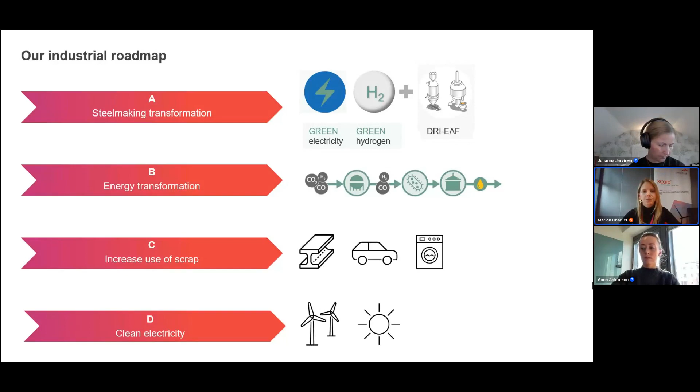Now going a little more into the details of the different pillars. Steelmaking transformation, as I already mentioned, we're working on switching from natural gas to hydrogen, but also sourcing the green hydrogen. For this, it's important to mention there are synergies and collaboration with local governments to produce this green hydrogen. So it's not only that we rely on an existing source, we are also involved in generating that green hydrogen.

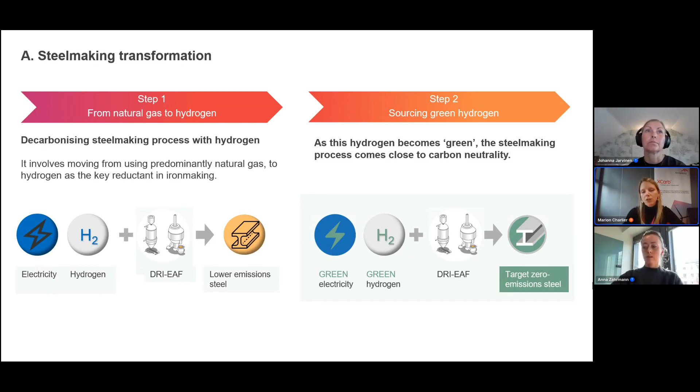Then in terms of energy transformation, I told you I'd give an example. This is the one I've chosen, existing today in our mill in Ghent, Belgium, where we are actually capturing the blast furnace gas and transforming it into ethanol that can be used in various applications, for example transport. So this is an example of improvements that can be brought to a blast furnace site, which is today the most intensive production route.

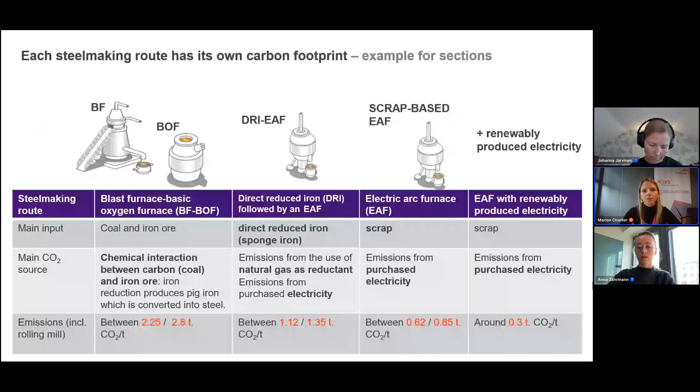We continue with increased use of scrap. As I told you, the scrap has to be recovered as best we can, and we make sure to use it wisely to make new steel out of waste. This is a fascinating feature of steel, that it can be recycled indefinitely without losing its mechanical properties. Knowing this, it would be a pity not to recycle the scrap that we have.

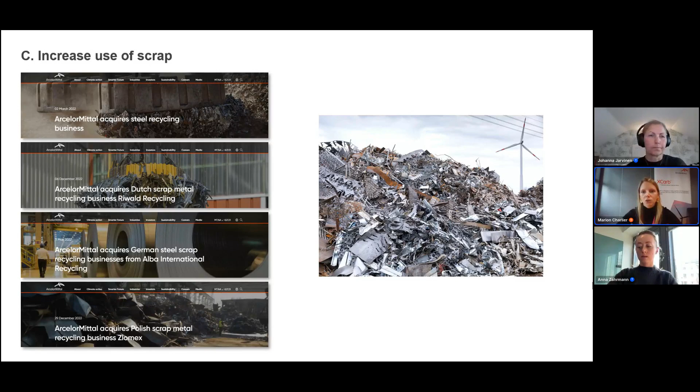And as a link to the use of clean energies, I wanted to talk briefly about the XCarb Innovation Fund, because I think this is quite unique. ArcelorMittal has committed to spend $100 million a year into other companies, companies necessary to reach our carbon targets, because most of our developments really rely on the use of energy. We're talking about hydrogen, renewable electricity, and we need to make sure we're able to produce that extra demand of electricity, and that we're working together to achieve these targets. Even though we're launching a lot of initiatives in-house, because we're still manufacturers and there are things that are our responsibility as steel makers, there are other things that are not our knowledge or part of our skills. So we need to make sure we work with the right collaborators to make that happen.

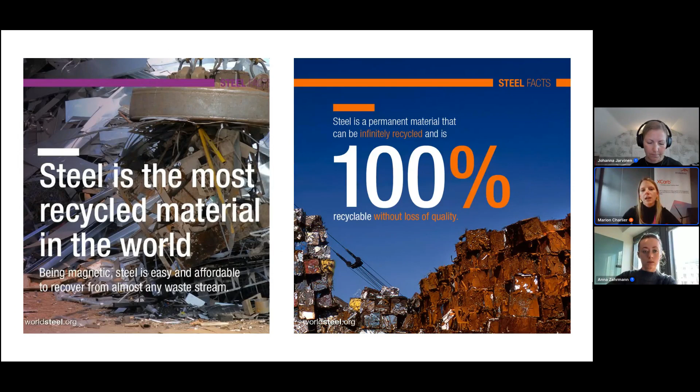So now, for the next slides, I would like to come back on the EAF production and on the recycling of steel, because within all of these initiatives that I have told you, there are many things ongoing, but it's important to stress that not everything will be ready at the same time.

First of all, it's really important to understand that both primary steelmaking and secondary steelmaking need to decarbonize. We need everything I told you, like the switch to DRI, the use of efficient energies and so on, to be deployed. But switching one manufacturing site from a blast furnace to DRI takes a couple of years, also to source the green hydrogen.

So if today some customers are contacting us to reduce the embodied carbon of their project, we would advise them to work with our brand called Recycled and Renewably Produced, which covers all of our EAF manufactured products, meaning that we recycle them and use renewable electricity for that.

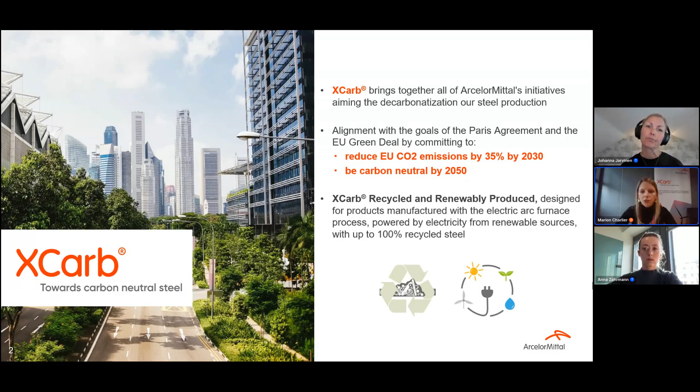For example, if I take our sections that we manufacture here in Luxembourg, we use 100% scrap and renewable electricity. And doing so, we are able to bring the global warming potential for the production stage to 333 kilos of CO2 equivalent per ton of steel. If we compare to the average for the global steel industry today, the difference is quite significant.

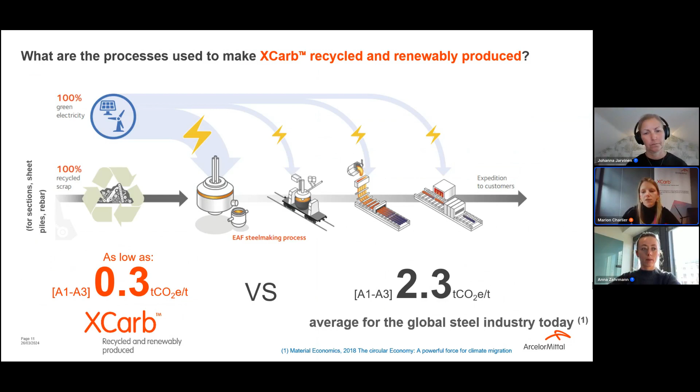Within this XCarb Recycled and Renewably Produced family, I just told you about the sections we make here in Luxembourg. In Luxembourg we also produce sheet piles, but there are other products that can be made through that production route. We have hot roll coils that can be used to make steel deckings, facades. We have rebars, heavy plates, which are used in construction, but also in the energy sector for wind farms, shipbuilding, and so on.

So yeah, this was the first part really related to steelmaking, what the steel industry is deploying, and also what we are doing within ArcelorMittal.

Thanks, Marion. You mentioned there quite a few ways to decarbonize steelmaking. Apart from those you mentioned, are you aware of any other initiatives in the wider industry, or yourself, that people are maybe starting to look at the moment, which are not ready but have potential?

Yes, so there is one more path being investigated at the moment: the direct electrolysis of iron ore. As I told you, when we make primary steelmaking using iron ore, which is present under the form of iron oxide, we want to remove that oxygen from the iron. In the blast furnace and in the DRI, we do so by using a reductant, either coal, natural gas, or hydrogen. But it's also possible to detach these atoms from one another using direct current, using electricity, so we do not need the use of coal, natural gas, or hydrogen.

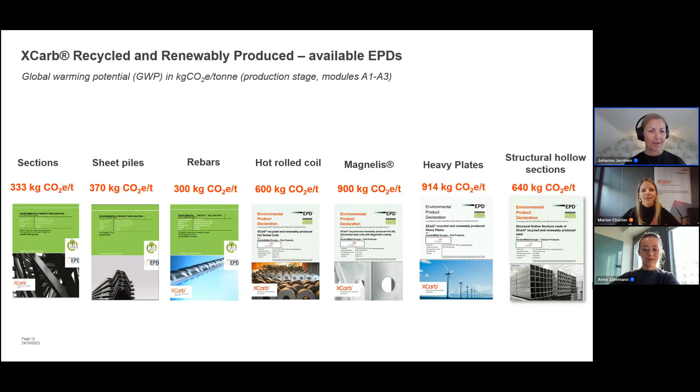Next, second block of today's contribution is about decarbonizing the built environment and how steel structural solutions can support sustainable projects. So here we've covered the more material science, material part, and we enter the more structural engineering part.

So I wanted to start with this LETI guide, which has been published in the UK, where some targets in terms of kilo of CO2 equivalent per meter square are provided depending on where we are in time. If we take as anchor, as targets, what they provide for best practice 2030, we see that we need to fall below 350 kilo of CO2 equivalent per meter square.

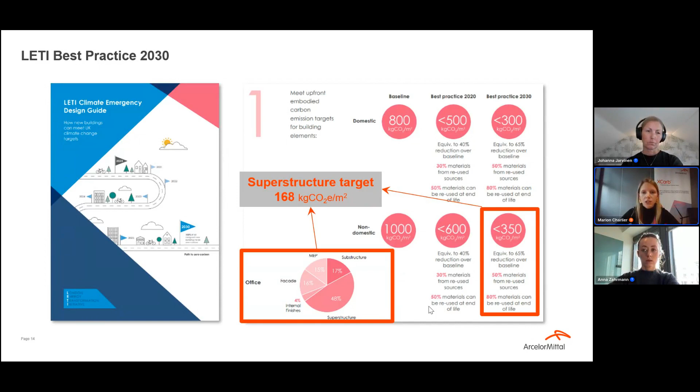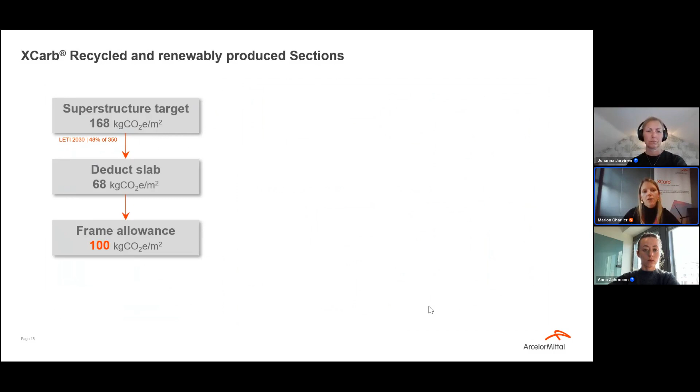If we look at the chart at the center of the slide, we see that for an office building, roughly the superstructure accounts for half of the emissions. So going from 350 kilos of CO2, we take half, giving us a target of roughly 170 kilos of CO2 equivalent per meter square. We deduct the slab, which we assume is roughly 70 kilos of CO2 equivalent per meter square, leaving an allowance of roughly 100 kilos of CO2 equivalent per meter square for the frame.

Now we look at the carbon intensity. If we take an office building as an example, we see that depending on the height of the building, we have a different steel intensity. As an example, for a steel frame high-rise building, we have roughly 90 kilos of steel per meter square.

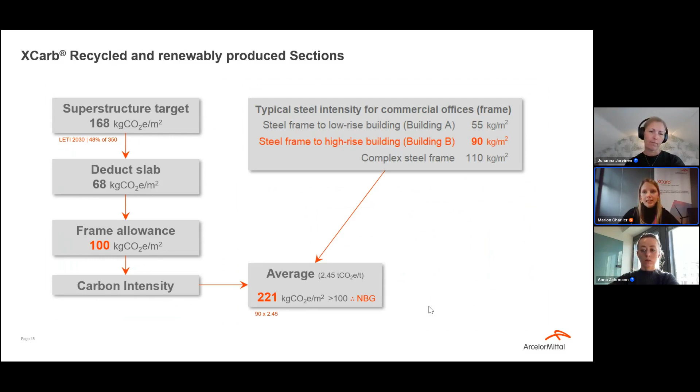So now we have several possibilities in terms of carbon intensity. With an average of roughly 2.5 tons of CO2 equivalent per ton of steel, which is what we have for the blast furnace route or as an average in some parts of the world, we would end up with 221 kilos of CO2 equivalent per meter square, which is above our target. But if we use xcarb recycled and renewably produced steel, because the carbon intensity factor is much lower, we reach a much lower number, actually way below our target, so we're okay with that.

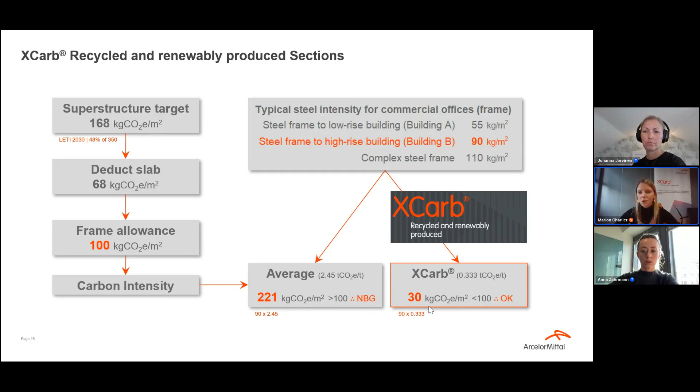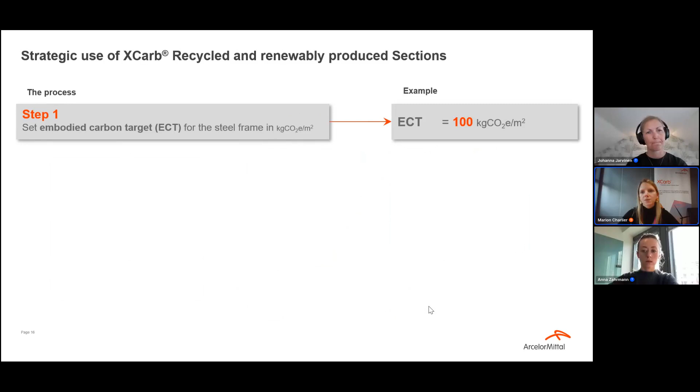But instead of using xcarb everywhere, we can set an embodied carbon target. So here we have our 100 kilos of CO2 equivalent. Then we calculate the steel intensity, which we know for our office high-rise is 90 kilos of steel per meter square. We calculate the average carbon intensity required for the steel sections, and we see that we would need to reach a carbon intensity of roughly 1.10. To meet that target, we can calculate the minimum percentage of xcarb required, and based on these numbers, we would need 64% of xcarb to meet the target.

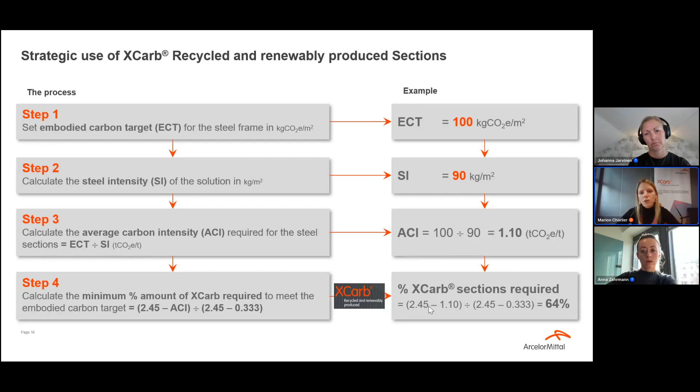So this is the kind of reasoning we can apply when looking at material only, which is good. But choosing low carbon material is clearly not sufficient. As architects and structural engineers, we need to couple this with clever design, trying to reduce to the best of our capability what we build. I assume most of you are familiar with this hierarchy where we try to build nothing, then build less, we need to build clever.

For example, when it comes to steel structure, quite simple but effective measures would be, for members where it makes sense, to use high steel grades. For example, for columns, which are driven by resistance, this makes the superstructure lighter. We need steel sections which are globally smaller, we have less material, and so we're making carbon savings. We're not even talking about low carbon steel here, just making material savings. But on top of having a lighter superstructure, we will also have less foundations. So all of these things need to be taken into account as a whole, really having this holistic view of the project.

Another example is the use of cellular beams, beams in which we have holes in the web, because from a certain number of levels, we can actually gain one level, since we reduce the floor to ceiling distance. This reduces the total height of the building, which also translates into savings - money, but also carbon - when it comes to facade, staircase, and so on. All these things need to be carefully thought through when we prepare the project.

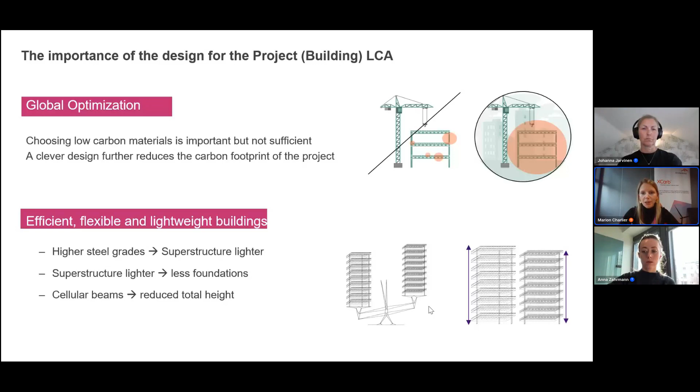Talking here about columns, it's a simple but clear example. We consider a steel column subject to axial loading, buckling length 3.5 meters. We make a first pre-design, and if we design in S235, a very basic steel grade, we would require as a section an HEM 280, which is almost 200 kilos of steel per meter. But if we just change the steel grade to S355, which is also quite basic but better than S235, now the required section is smaller, an HEB 320. So we're reducing the weight of the column and making savings in terms of carbon.

Then on the third data point, we're actually accumulating two things: the use of HISTAR 460, an even better steel grade, and xcarb. Combining these two, the reduction is even bigger.

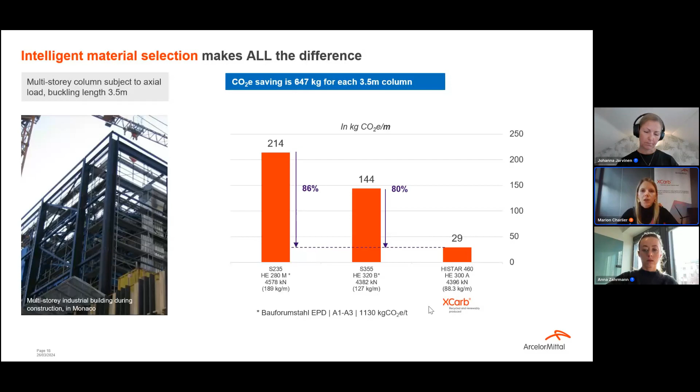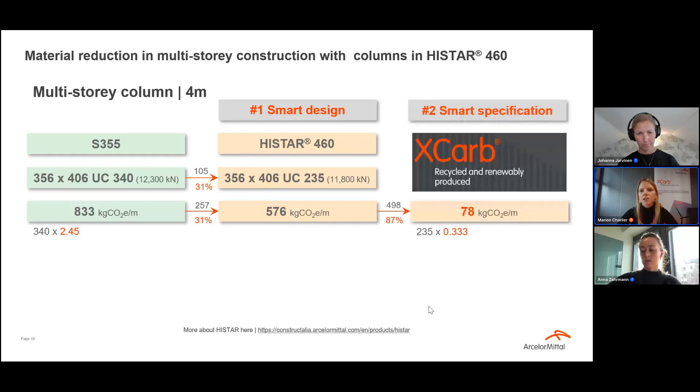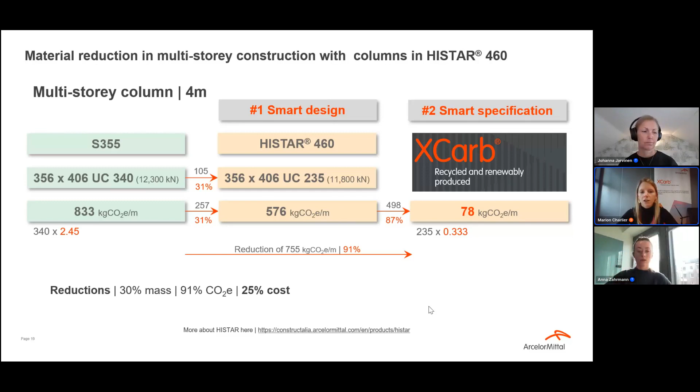Here is another example, similar to before, starting from S355 for the column. First, we do a smart design—that's the first step. Here we use a HISTAR 460, and then with smart specification we use xcarb steel, reducing the carbon footprint by 91%. We have a reduction of CO2, but also a reduction of cost. That's important to consider, since we always have different constraints on a project—sustainability to address, but also a budget to respect, speed of mounting, fire requirements, all these things need to be kept in mind.

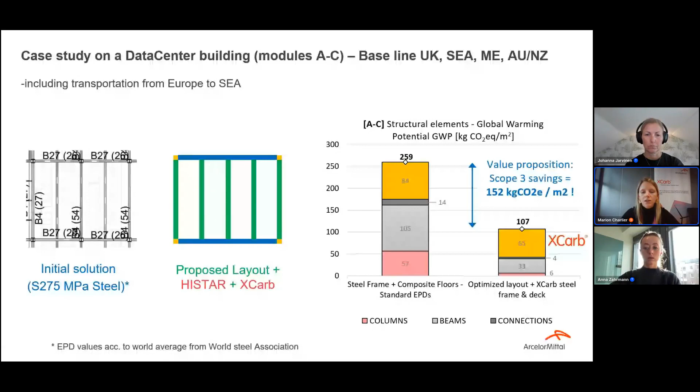Another example here, for a project where we received from our collaborators a first pre-design initial solution, a steel frame based on S275 megapascal steel. We simply switched to HISTAR for the columns and the use of xcarb. Also, if you notice on the option on the left, there was a column at the center of the bay that we removed in the proposed layout. From this, we could quantify the Scope 3 savings and highlight the benefits of using that new layout.

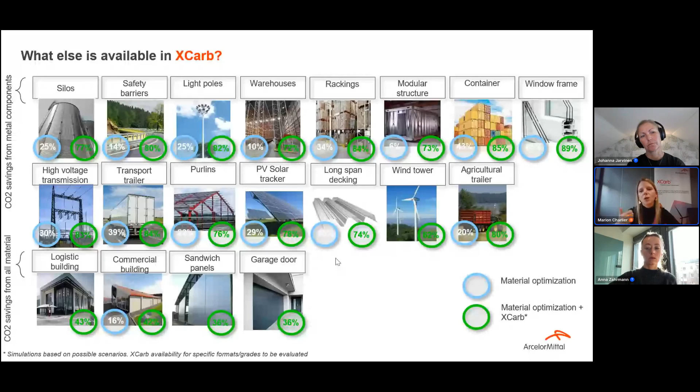Going on to other aspects of buildings with steel—so far I've mainly talked about steel frame, but there are other products that can be obtained in xcarb. You can see here some examples where, in the blue circle, you see the gains achieved with what we call material optimization—so not yet talking about low carbon steel. Then the green circle shows the gains when we combine material optimization and low carbon steel, xcarb.

In terms of structural system, I've already mentioned cellular beams, which to me are a really good example of an innovative solution we can deploy. We take one beam, cut continuously through the web, separate the two parts, and reassemble them by welding. We end up with a beam that, compared to the original, has a greater moment of inertia but the same weight as the original beam, which has a lower moment of inertia. The cellular beams are also interesting if you want to pass, for example, ducts or MEP through the openings.

Something I'd like to mention, because I personally feel it is really important, is to play to the strength of each material. So far I've been talking about steel, but for me it's really important to combine materials and place them where they are most needed—to use the right material in the right place.

So of course we talk about composite structures. Steel and concrete composite structures are quite well known and well deployed, because we really put the material where it is needed. But we are also working at the moment on steel plus timber solutions, which have existed for some time as non-composite members—for example, just putting a CLT slab on the lower flange of a steel beam. Now there is research ongoing at the University of Luxembourg to demonstrate composite action between steel and timber, which is really an extra step we can achieve in terms of structural optimization.

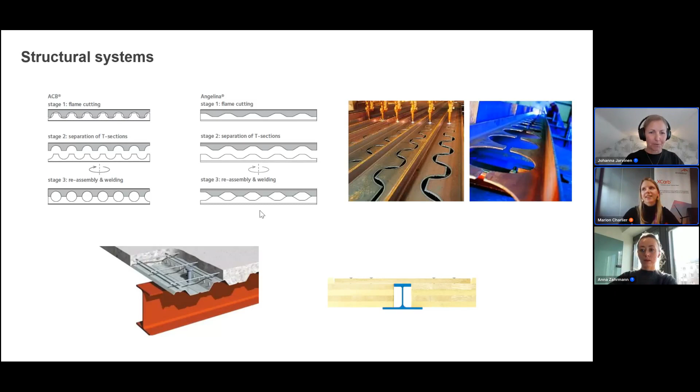The next block is what I call closing the loop, facilitating steel reuse. Because so far we've been talking a lot about LCA and decarbonization of steelmaking, but I personally feel that a dramatically important topic when it comes to the sustainability of the built environment is circularity.

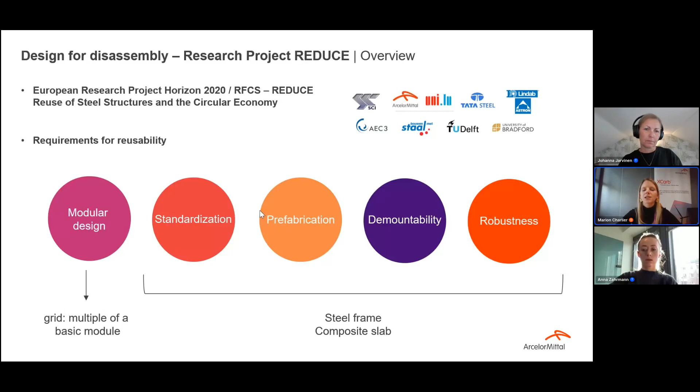So the basis of this research was to work on modular design, to think of buildings as multiples of basic modules. From that we could work with a set of standardized sections, so a lot of prefabrication, and then make sure that we designed for disassembly, so that we're able to dismantle the buildings and recover the elements and rebuild from that.

So for example, one part of this project was focused on adjustable connections. If we assume that we work with standardized beam length, actually we could have some issues in reusing that beam if then in the second life of the building the columns have a different size. That's why they came up with these adjustable connections.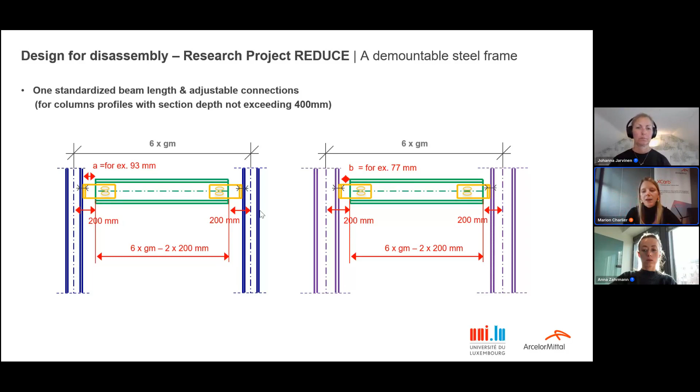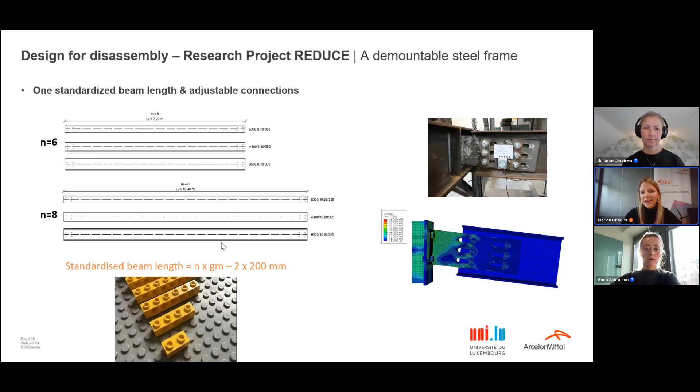So the principle is really like Legos. We're working with standardized beam lengths, which are a multiple of the basic grid module. Then we remove two times 200 millimeters, and we work with these adjustable connections, which have been tested in the lab and also numerically modeled to make sure that we can apply the design based on that.

Also, the second really interesting point which has been developed is demountable shear connectors. As I told you, composite structures are really important when it comes to using less material, because we use material exactly where it's needed. But usually steel-concrete composite construction is non-demountable. We could do, for example, a steel beam with a hollow core slab or a concrete slab just put on top of the beam, which is easy to dismantle, but we're not activating the composite action. Here they have developed these special demountable shear connectors with bolts that allow activation of the composite action, but still allow the slab to be removed from the beam.

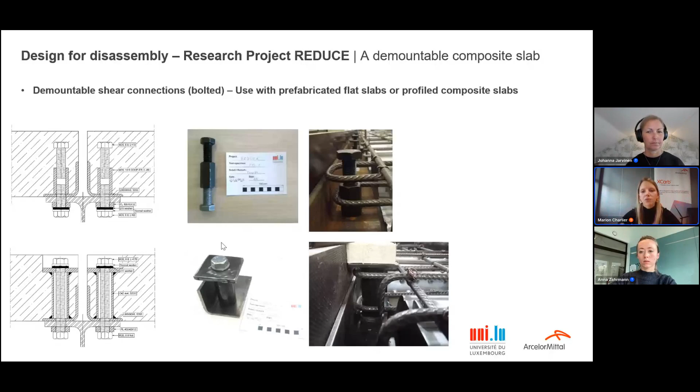From this research project, there was a pilot project built just next to the University of Luxembourg, called La Petite Maison, because it's supposed to be a little house. It has been built and it has been dismantled, so the demountability character has been showcased. If I'm not mistaken, they're going to rebuild it at another location soon. So this will really be a pilot project - a small one, but it's important to highlight that what has been prepared in the research can be deployed in reality.

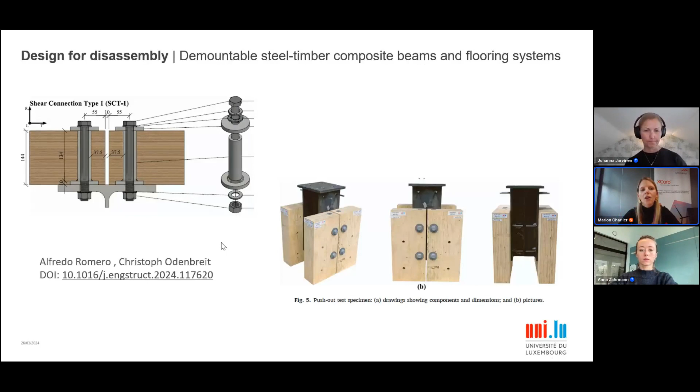Just for your information, the University of Luxembourg is now working on the same principle, but with steel and timber, also activating the composite action and allowing the dismantling of the elements. So this is ongoing.

So definitely this is the first step, the design for disassembly, because we would like all to reuse the elements. And sometimes we have people coming to ask us, where can I find reclaimed old steel beams? Some stockists have some, and you can find them maybe in bigger quantities in some countries than others. But if we want to enrich that stock of reused old beams, we first need to make buildings so that we design them to be demountable. Because otherwise it's a bit the chicken and the egg.

If buildings are not designed to be dismantled, then most of the time people will just take them down as usual, crushing the concrete, cutting the steel, bringing it back to the scrapyard. So there is a certain effort which needs to be deployed if we want to make sure that we can easily recover the steel beams. But let's assume that we do that and that we deploy more and more these kind of technologies, so we do have quite an important stock of reclaimed steel elements.

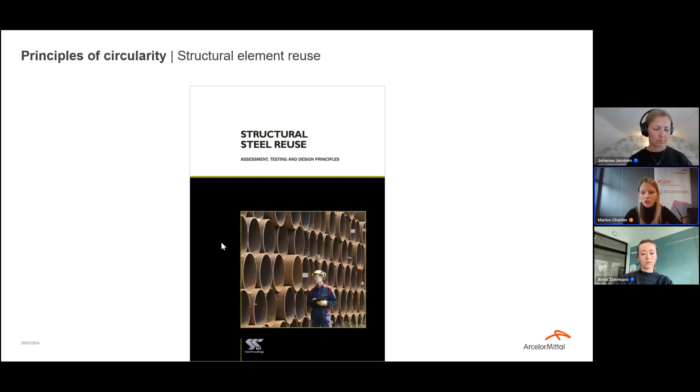There are some guidelines which have been prepared, and some people are still working on that at the moment, to help you adapt your design equations if you're working with reused structural steel. For example, there is the guide that was published by the SCI in the UK, which is very well done because it's really written as a protocol. It's really meant to be used in practice, not just theory, it's really made for practitioners.

I wanted also to briefly present this project, which was built in Belgium, in Louvain-la-Neuve, where they have made this small office building based on reclaimed steel and timber elements. The timber elements are new, they're not reclaimed, and also there is no composite action here, but still it's a good example that reusing steel can be done.

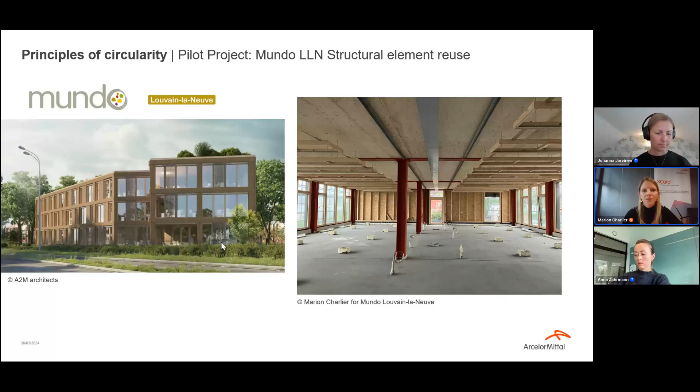When we talk about circularity, we can also talk about designing for adaptability. For example, if we use large spans, some people may debate that if we have bigger spans, maybe we will increase the embodied carbon, which is true in some cases. But on the other hand, if you make sure that you have a lot of volume and quite a flexible space, it means that you have some kind of flexibility when it comes to the use of the building.

This encourages the fact that we can ensure that the building will live longer, which is really what we try to do, because unfortunately today there are still many buildings which are being demolished, even though they haven't even reached the 50 years lifespan.

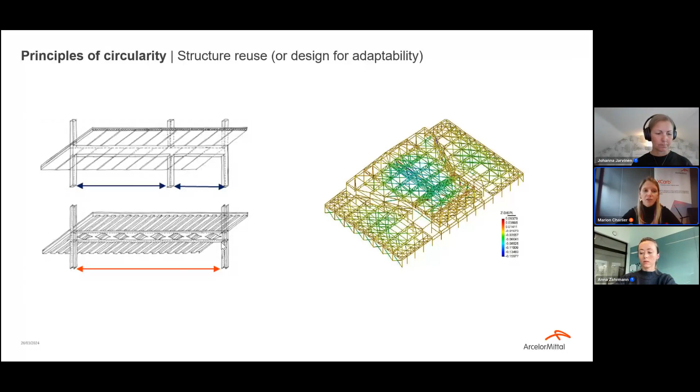So this was about circularity. There are many things which can be said, and to be honest, there are many very interesting contributions from academics and research centers that I would like to present. So if it's a topic that is of interest for you, I will be glad to send to you their research papers and their achievements in that field.

Thank you, that REDUCE research is obviously very interesting. If you can just move a building or parts of it to some other places and rebuild, I think it has been done in some other ways too. Do you think there's a limitation on the size that you can build using these principles?

I would say no, in a sense that all the systems that are being deployed, the developments are not constrained to a size. But it's true that in reality, it has been built so far only for this Petite Maison project. So it has been built only for a small scale project so far, but definitely this could be scaled up. There is no scientific reason why it would not work, because all the systems have been thought of as usual structural systems, not only meant for small, tiny houses.

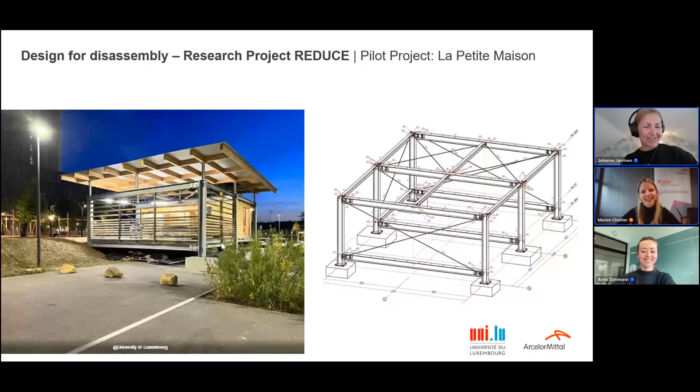But so far, this is the only real project that we can refer to. If you want to build a bigger one, I will be interested. If anyone is interested, contact us and we'll make it happen.

All right, then some more about embodied carbon.

So this is the last piece of contribution that I wanted to mention today: what we call the co-engineering approach, the global approach that we push for.

First of all, I wanted to use a slide prepared by a person that I admire a lot and work with sometimes, Lee Franck, who's working in Luxembourg. Last week we participated together in a seminar, and she came up with that slide, which I thought was very accurate: we really need to keep in mind that if we want to reach a low carbon project, we need to start early.

We need to work with a full team. We need to educate all the stakeholders - not only the engineers, but also the end customers, the general contractors, the demolition companies, everybody working in the construction field and who is also going to receive the project in the end - to collaborate, to iterate. I think we're deploying things, and we're still at a very early stage of our developments, and we should not be afraid of challenging what we do, to try again. And of course, it takes more time than business as usual, but it's what we need to do if we want to really reach efficient targets.

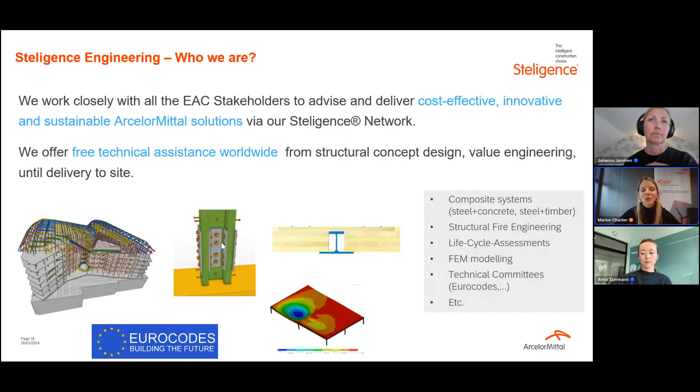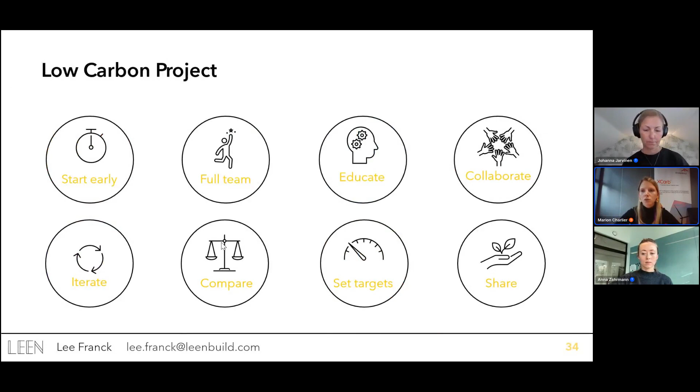And when we say that we provide technical assistance, we really want to come up to that approach and that thinking that we want to start early, to work with you, to collaborate, set targets, and so on. Here is a little bit what we try to deploy when we work with our collaborators and what we advise others to do as well.

First of all, to enable high performance design, not to over design, which is something quite regularly done today. To use less but stronger steels when it makes sense - for example for the columns, as I showed you with the columns examples, it can lead to direct CO2 savings, even if we're not talking about low carbon steel.

To understand where the embodied carbon is in the project, so to run some kind of hotspot analysis, because you will see that some elements will be an easier win than others, so maybe we should start with these. To understand how steel products are made, because it's only if you understand the manufacturing, but also the supply chain, that you will be able to really make relevant savings. And of course here I'm talking about steel, but this applies to any other material.

And to act early and work together. Time can be the enemy of sustainability. Of course, the earlier we start working together, the greater will be the gains that we can achieve.